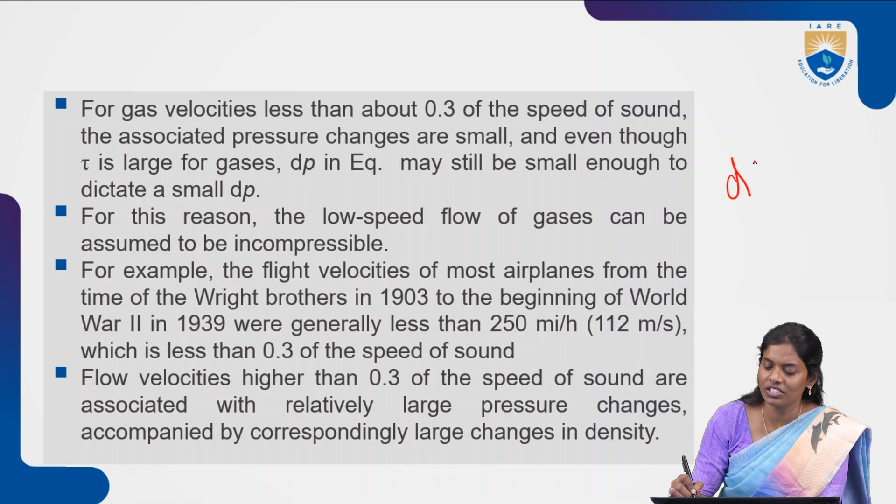So with that there is a change in density. The formula is d rho equals rho tau into dp, which means change in pressure is directly proportional to change in density. Where there is a significant change in pressure, correspondingly there is a change in density, depending on the effect of compressibility.

Compressibility is defined as minus 1 by v, dv by dp. When there is a change in the compressibility effect, the formula becomes d rho equals rho into tau into dp. So that change in pressure gives us the change in density.

For gas flow, if the velocity is less than Mach 0.3, the associated pressure changes will be small. Even though tau is large for gases, from the equation del rho will be very small. So when dp is of less value, d rho will also correspondingly be of less value. Due to this, we consider that gas flow field as an incompressible flow.

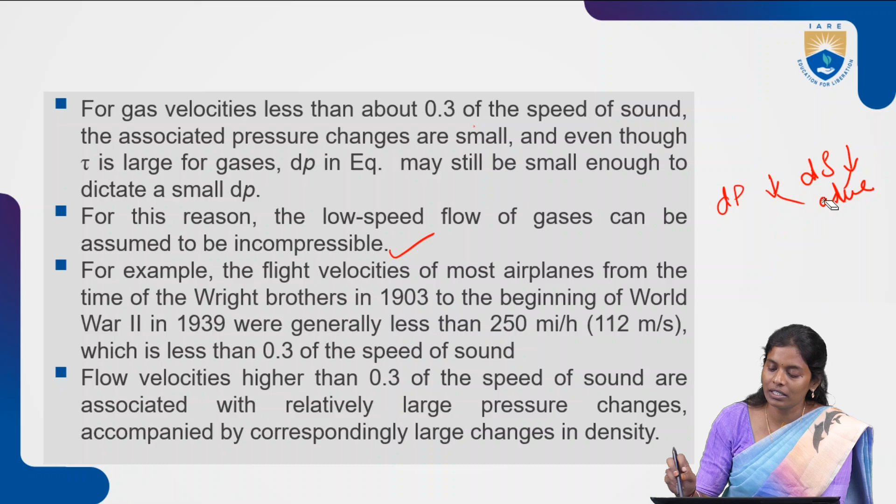Consider the example of flight velocity of airplanes from the time of the Wright brothers, from 1903 to 1939, where the speed is varying but remains less than Mach 0.3. This means the flow field can be considered as incompressible flow.

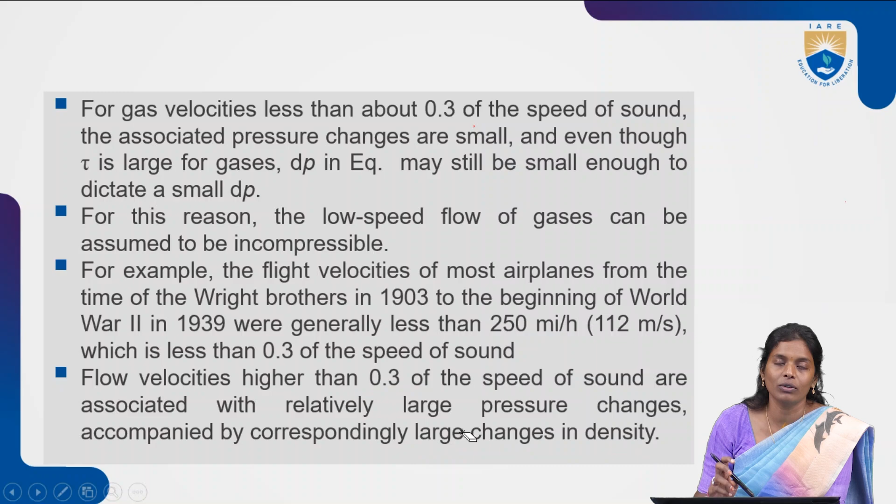With flow velocities higher than 0.3 times the speed of sound, the pressure changes will be more, and correspondingly there are larger changes in density. So at higher velocity, the change in pressure causes larger density changes, and that is what we call compressible flow.

At that time, compressibility effects on airplane aerodynamics became important. Since the advent of high performance aircraft of the 1940s, we see compressibility effects considered as one of the important factors. Indeed, for modern high speed subsonic and supersonic aircraft today, the older incompressible theories are wholly inadequate, and compressible flow analysis must be needed.

Compressible flow is considered as one where the change in pressure over the characteristic length of the flow, multiplied by the compressibility, results in a fractional change in density, d rho by rho, that is too large to be ignored. It means we can't ignore the density changes, we have to consider them into the picture, meaning the flow is a compressible flow.

In most practical problems, if the density change is 5% or more, we consider that flow to be a compressible flow. This is one of the factors showing why the importance of density is there.

So if your density change is small or lesser, you can consider it as a constant. So at that time, we will be calling the flow an incompressible flow. Flow is considered as an incompressible flow.

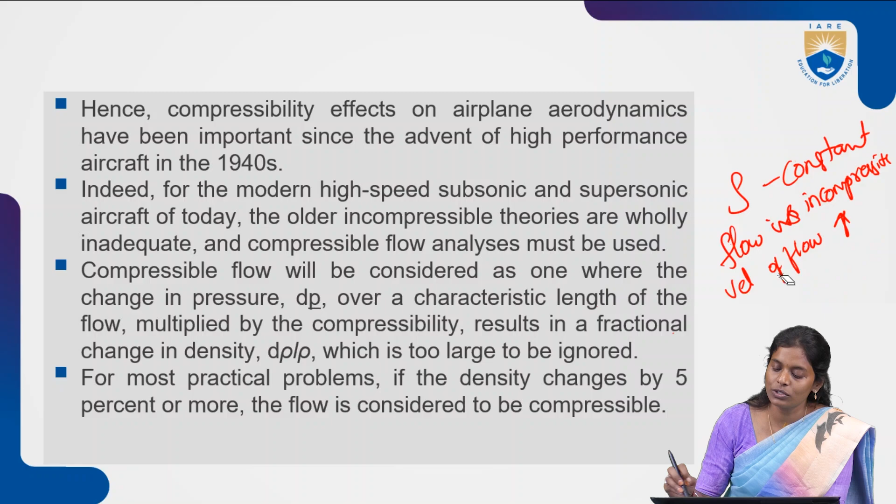So as the flow is increasing, what will be happening? As the velocity of the flow is increasing, there will be pressure changes. So P change will be there, that is, pressure changes will be there. So correspondingly the density changes will be there. Those density changes at higher velocities we won't be able to neglect. So that's why we have to consider the effect of compressibility inside the flow.

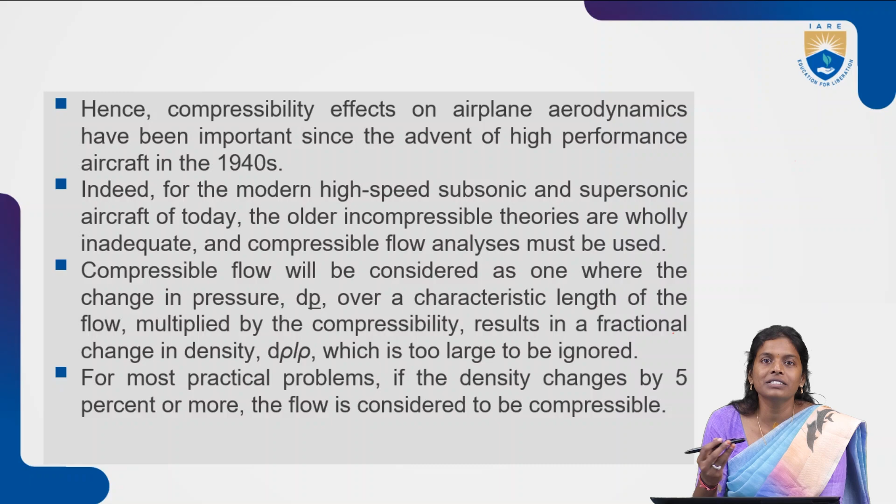So for that, as we are telling, if the density changes are 5% or more, the flow is compressible. So before that, we are stating that flow velocities are increasing. That means as the flow velocity is increasing, there is a change in the density. So it means that the characteristics of the flow regime will also vary with respect to the flow velocity. So now we talk about what the flow regimes are, the different categories of it.

So before going to that one, we will be considering the far upstream of the body. On the far upstream of the body, the flow is uniform. So with the free stream velocity, uniform flow is there. There is no change in the flow direction. So V infinity, that is the free stream, we are considering.

So after that one, let's see what a streamline is. A streamline is nothing but a curve in the flow field which is tangent to the local velocity vector V at every point along the curve. So that particular one we will be calling a streamline.

So now we will be considering a flow field. Suppose this is a flow field. Inside this particular flow field, consider any arbitrary point. At that arbitrary point, what will be there? Generally flow properties means pressure, temperature, density, and velocity. These will be the local pressure, temperature, density, and velocity at that particular point. So all these quantities are point properties.

So at this particular point, suppose we consider P1, T1, ρ1, V1. If we consider another point, the pressure, temperature, density and velocity might be different. So these quantities may vary from one point to another point.

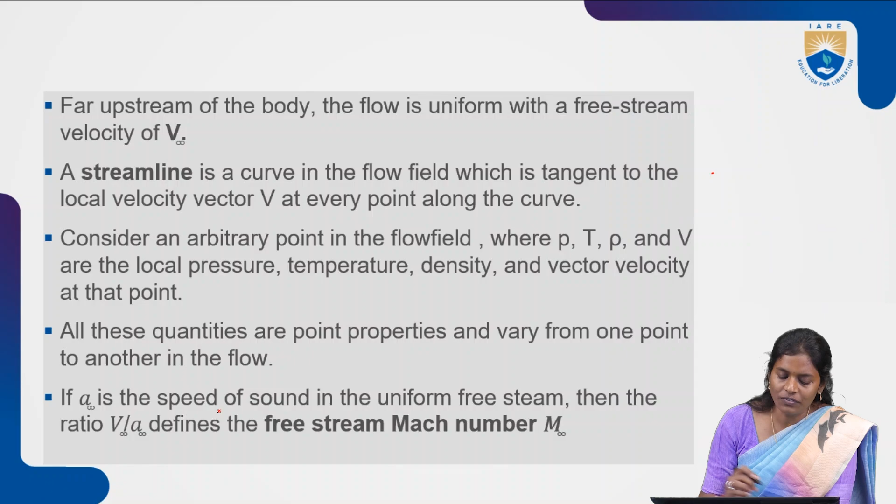Okay. Suppose a is the speed of sound in a uniform free stream. Then the ratio of the velocity of the object divided by the speed of sound is nothing but the Mach number. This is the number which tells us the flow response. We know the speed of sound is nothing but the square root of gamma RT, right? And V is the velocity of the object.

Now, compressible flow means the flow velocity is increased, higher flow, right? Basically, above Mach number 0.3 we call it compressible flow, and Mach number less than 0.3 we call incompressible flow. Below this, the density is constant; above this, density varies. So considering this as the base, above 0.3 Mach number we consider it compressible flow. We already know the speed of sound, a constant value of 340 meters per second, and we will have the velocity. If that changes, then we will have Mach number variations.

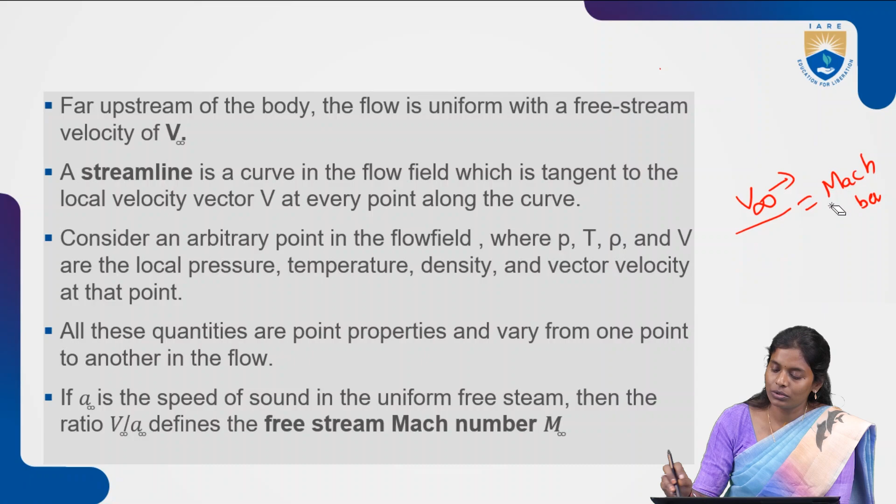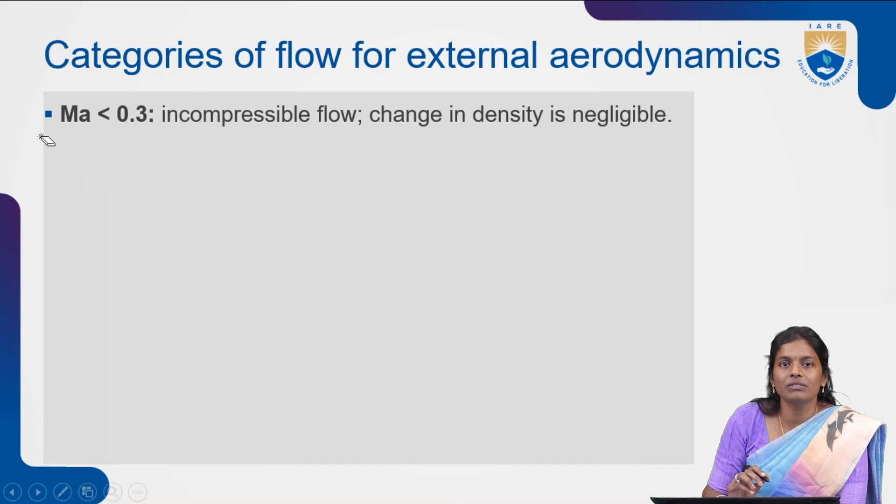So coming up, we'll see the categories of external flow. As I told, if Mach number is less than 0.3, we consider it an incompressible flow. I am not telling the density change will not be there. The density changes will be there nevertheless, but they are negligible, or we can consider it as a constant.

Mach number between 0.3 and 0.8 we will be calling subsonic flow, where density changes are significant and shock waves will not appear. It means there is no formation of shock waves, so there won't be abrupt changes in the flow field.

So that's why the shock wave formation will not be happening at this particular range of the Mach number. Next, coming to the Mach number between 0.8 to 1.2, the flow is called transonic flow. Here the shock wave will appear and divide the subsonic and supersonic flow regimes. So there will be a separation of the subsonic and supersonic flow regimes. And there is one more.

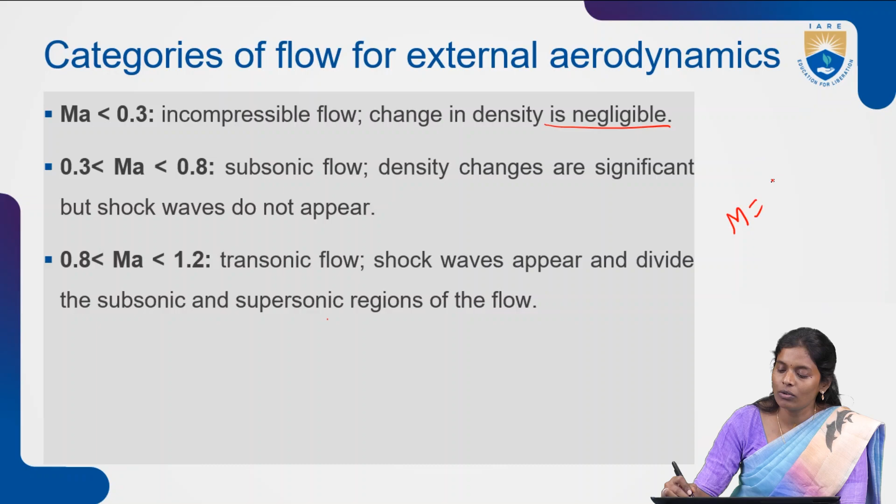If M, the Mach number, equals 1, we call it sonic flow. At that time, the velocity of the object will be equal to the speed of sound, right? Only when these two are equal will we have a Mach number of 1. So at this time we call the flow a sonic flow. Next, transonic flow is characterized by a mixed region of locally subsonic and supersonic flow.

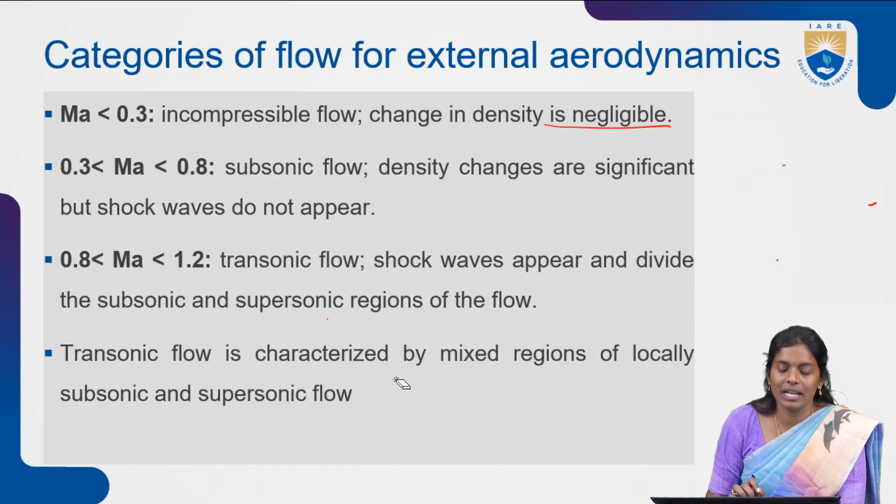Basically, what we call subsonic flow is Mach number less than 1. Mach number above 1 we call supersonic flow. But in the transition from subsonic to supersonic, there is a range of 0.8 to 1.2 that we call transonic flow. That's why they have said that transonic flow is characterized by a mixed region of locally subsonic and supersonic flows.

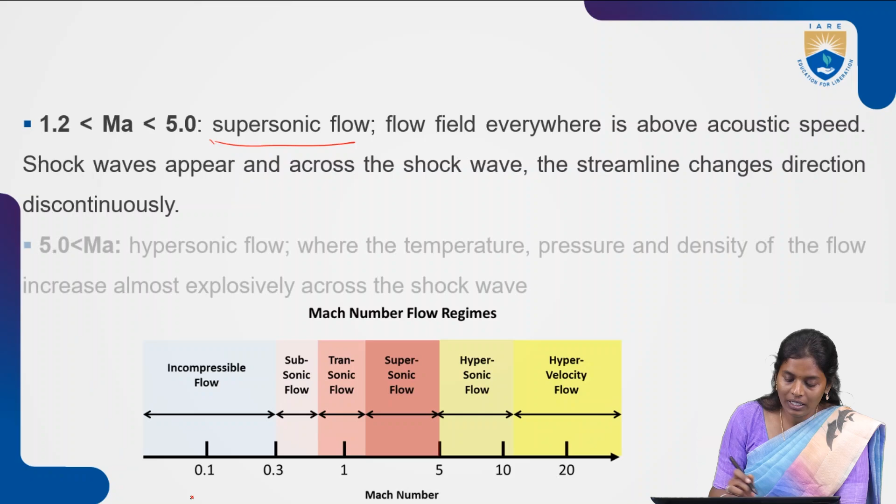Next, if it is 1.2 to 5, less than 5, we call it supersonic flow. Here the flow field everywhere will be above the speed of sound. Shock waves will appear, and across the shock wave the streamline changes direction. There is a streamline change there discontinuously. So here you can see that next is Mach number

above 5, right? If you have a Mach number above 5, we call it hypersonic flow, where the temperature, density and pressure increase almost explosively across the shock wave. There are changes in the temperature, pressure and density. So that we call hypersonic flow.

So here you can see the entire flow regime based on the Mach number. As I told, from Mach number 0 to 0.3 we call it incompressible flow, where density change is negligible, or we can consider density constant. The changes are not taken into the picture. From 0.3 up to 0.8 is the subsonic region; generally we call it subsonic until 1.

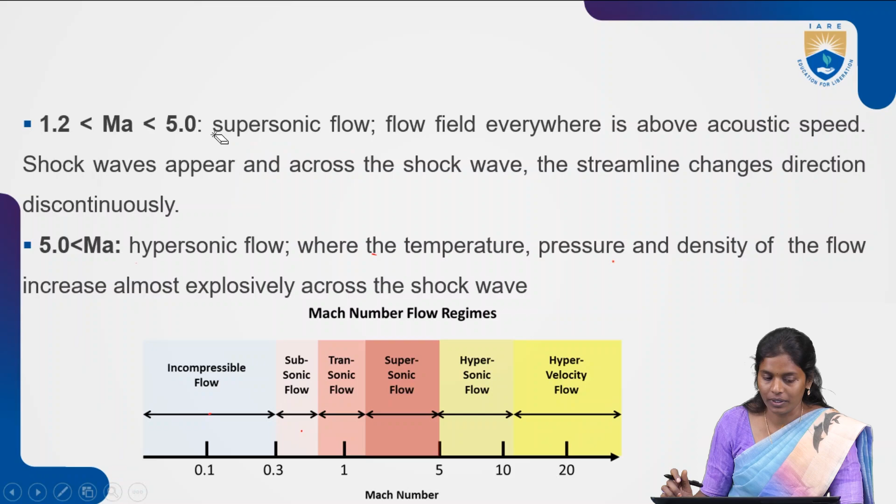Then 0.8 to 1.2 we call transonic flow, and below 5 we have supersonic flow. Above supersonic is hypersonic flow. More than that, we call it hypervelocity flow. So this is the flow regime of compressible flows based on Mach number. Now we will study these flow regimes in detail.

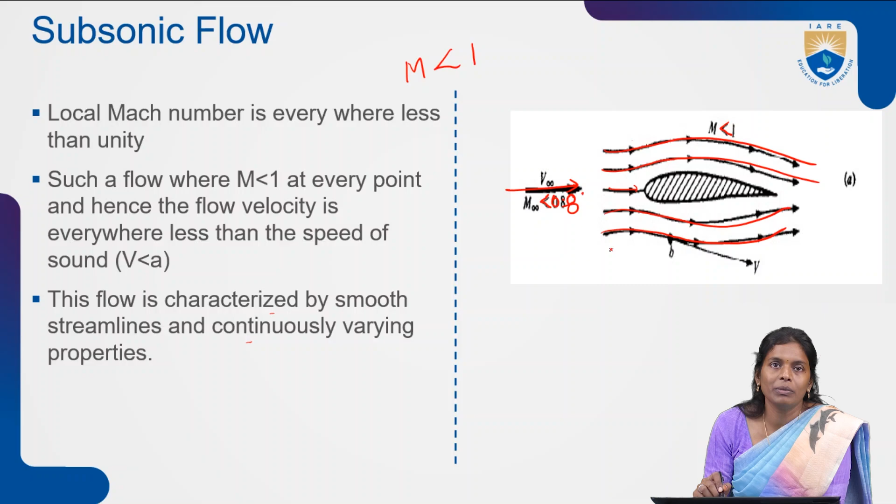The flow field is characterized by smooth streamlines and continuously varying properties. As I told, the properties will not be the same from one point to another. Though the flow is smooth, the properties change from one location to another. Initially we have straight and parallel streamlines in the free stream.

These begin to deflect from the free stream far upstream of the body, according to the position and the shape of the body. As the flow passes over the airfoil, the velocity V at the top surface increases above the free stream value. So what will the velocity be at the Mach number?

Now what we are telling here, the free stream is passing at less than Mach 0.8. So as it passes over the airfoil, V increases, and correspondingly M will also increase. But overall, the value of Mach number will be less than 1 only. It will not cross 1. So that is the one thing which we have to consider inside a subsonic flow: we will be having the Mach number less than 1 throughout the flow field.

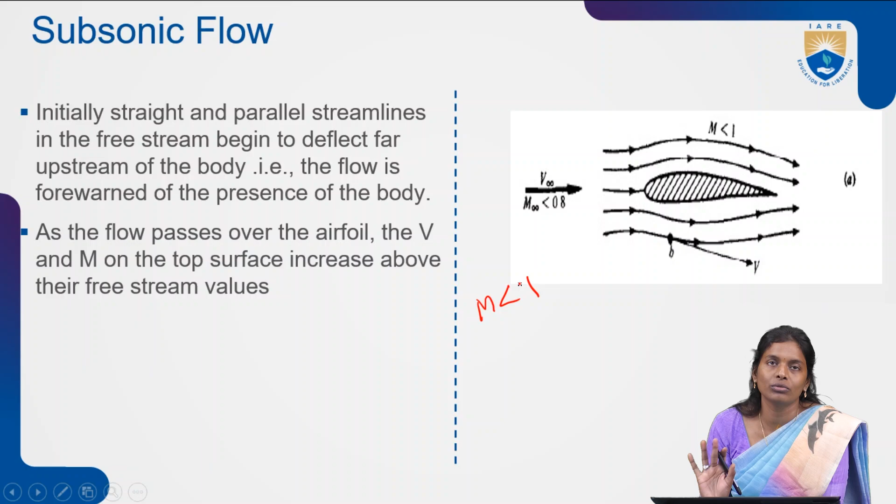Right. So now, next coming to the transonic flow. If the free stream Mach number remains subsonic, but it is sufficiently near to 1 — generally subsonic flow is less than 1, right? — the flow expansion over the top surface of the airfoil may result in a local supersonic region.

So you can see here, at the front we are having less than Mach 1, but in this particular region the Mach number is greater than 1. After a certain region, we are having less than 1. Here there is a formation of a shock wave. So it results in local supersonic regions. Such a mixed region of the flow, where we have a subsonic region, a supersonic region, and again a subsonic region, is defined as a transonic flow.

So if M is near 1, it is enough to produce a pocket of locally supersonic flow. This pocket will be terminating with a shock wave across which there will be discontinuous changes in the flow properties. As you know, if you are increasing the flow velocity, there is a change in pressure and correspondingly a change in density, right? It means the flow properties will be varying inside this particular pocket.

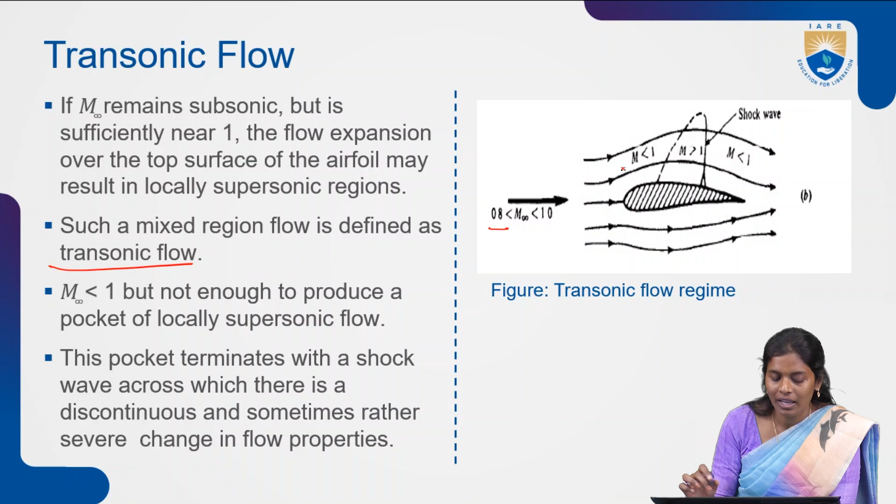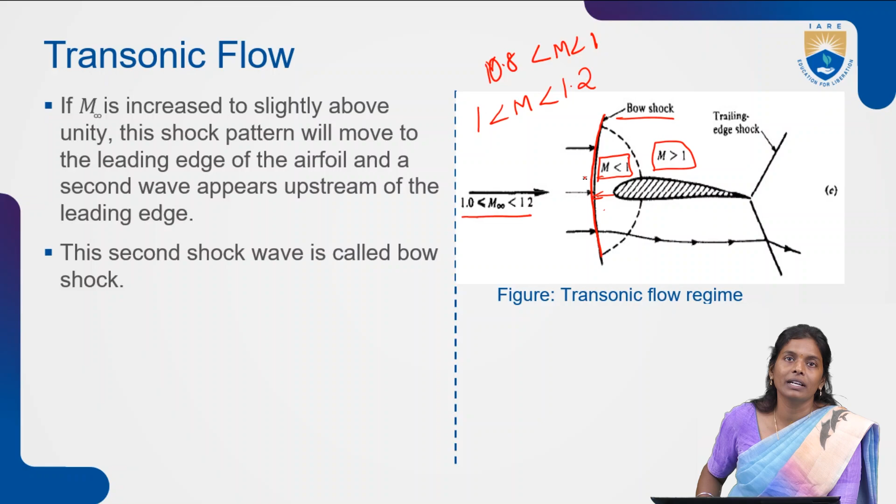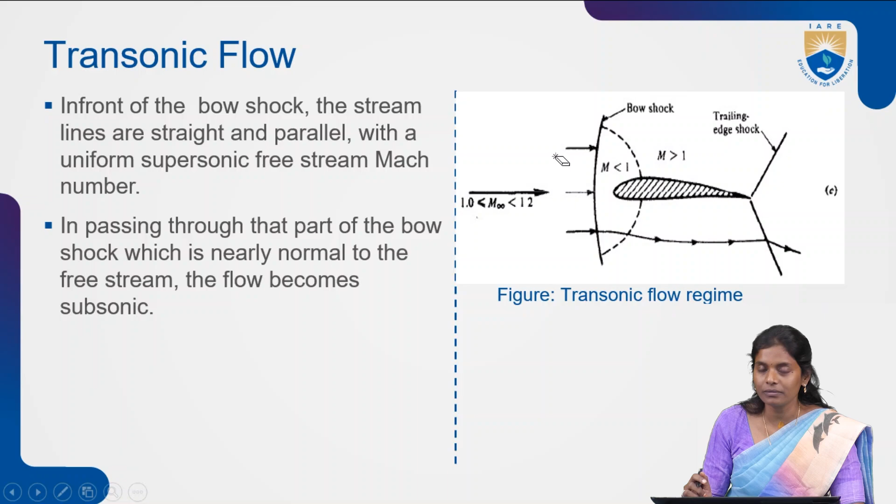In front of the bow shock, the streamlines are straight and parallel with the uniform supersonic free stream Mach number. In passing through the part of the bow shock which is nearly normal to the free stream, the flow becomes subsonic. That is the reason at this location we are having the flow as subsonic. So at this particular region we have a subsonic region.

So next, supersonic flow. Basically it is above Mach 1. But since the transonic flow lies between 0.8 and 1.2, specifically we will call it supersonic above 1.2. So now consider a flow over a wedge. A straight oblique shock wave is attached to it; a normal shock, by contrast, will be the perpendicular one.

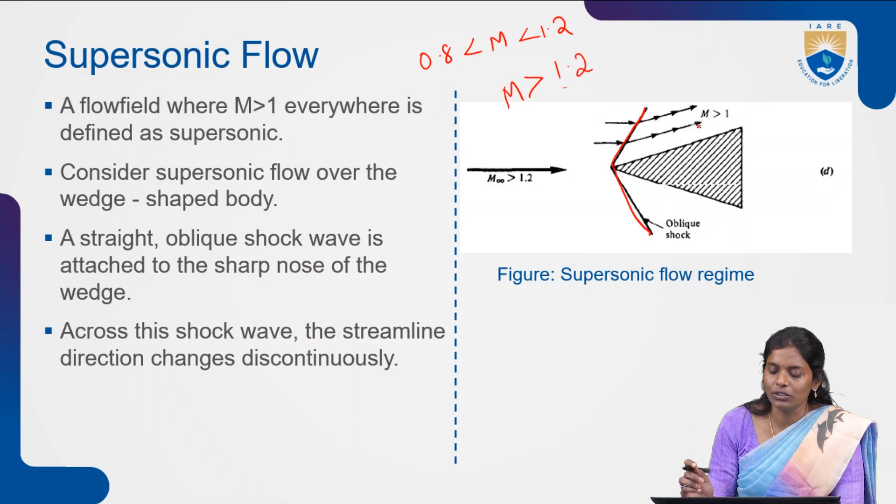So oblique shock means it is at a certain angle. We will see this in detail in module 2. But for the time being, understand that oblique shock means a wave at a certain angle which is attached to the sharp nose of the wedge. Across this shock wave the streamlines are changing; there is a change in the streamlines.

Ahead of the shock the streamlines are straight, parallel and horizontal. Behind the shock wave they also remain straight, but they take the shape of the wedge. Suppose this is the flow region, and this is the wedge we are considering. For this wedge a shock wave will form, that is an oblique shock wave. After crossing the shock wave, the flow field takes the direction of the wedge surface.

So the flow is supersonic at the upstream and the downstream of the oblique shock wave. You can see here we say Mach is above 1.2, and here also the Mach number is above 1. That is nothing but the supersonic region. Here the temperature, pressure and density of the flow increase across the shock, meaning ahead of and behind the shock wave there are changes in the flow properties.

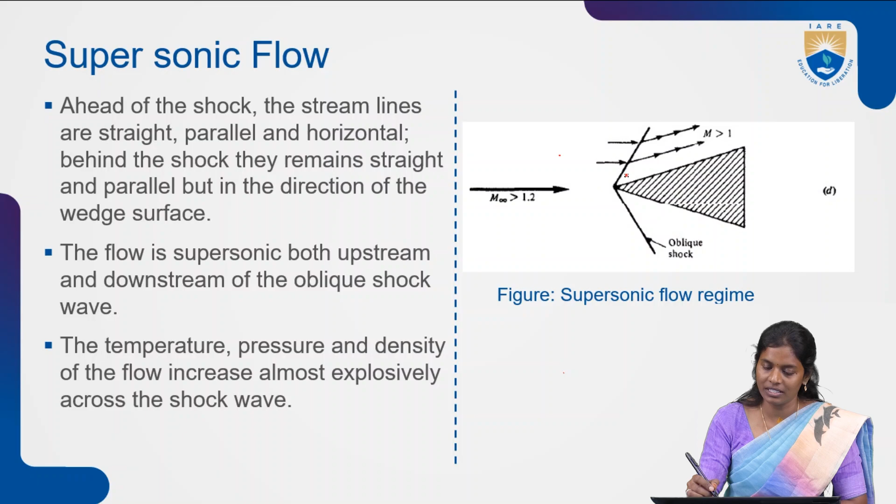Right. Next is Mach number above 5, which we call hypersonic flow. At higher speed the changes in flow properties are also larger. Previously for the wedge we had a shock wave formation, but it was not towards the surface; it was at a certain distance, at a certain angle. Here, the oblique shock wave that forms comes closer to the surface of the body.

The flow field between the shock wave and the body becomes very hot, enough to dissociate or even ionize the gases. So in this flow regime, ionization of the gases can happen. These effects, thin shock layers and hot chemically reacting gases, complicate the analysis of such flows. At this regime studying the flows is very difficult, because as the velocity increases at that particular height, the temperature changes, enough to dissociate or even ionize the gas particles.

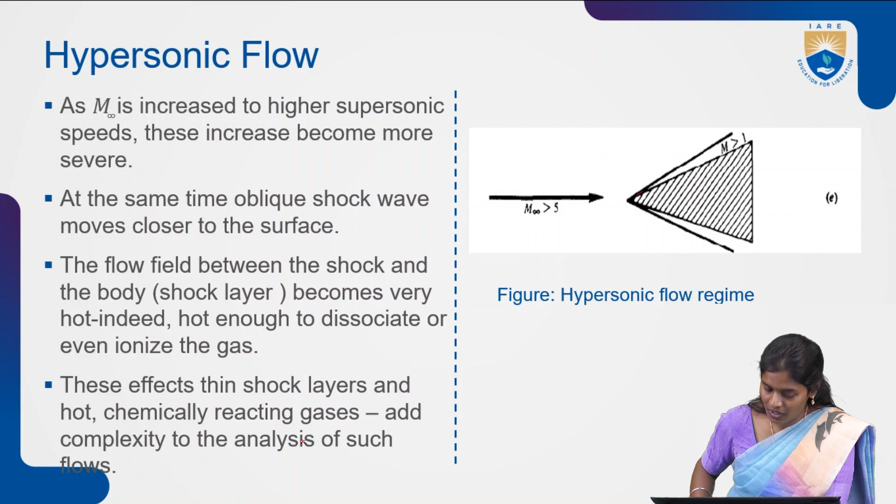So studying those thin shock layers and the interaction effect of the heat occurring on the body makes such compressible flows complex to analyze. So above Mach 5 we call it hypersonic flow. Mach 5 divides supersonic and hypersonic flow.

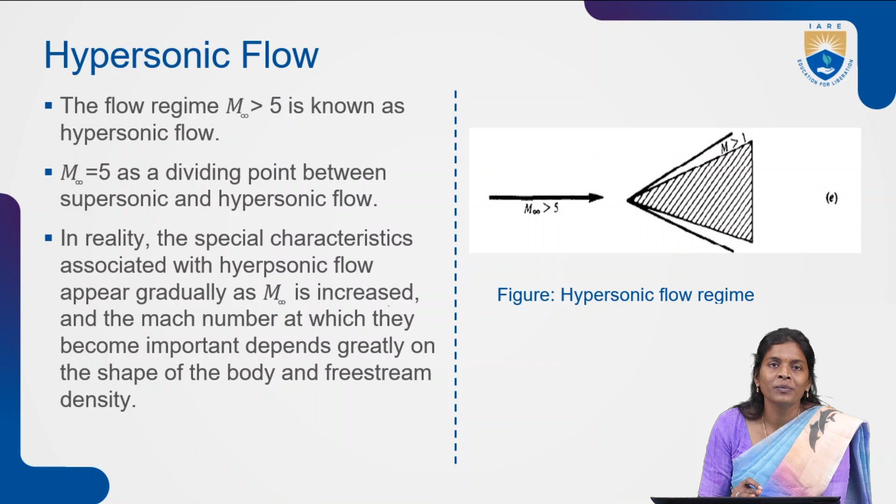In reality, the special characteristics associated with hypersonic flow as Mach number increases depend on the shape of the body and the free stream density. The Mach number at which they become important depends greatly on the shape of the body and the free stream density at that particular location. So mainly it depends on those two characteristics: the shape of the body and the free stream density. So this is about hypersonic flow.

Now coming to the Mach number, as I stated earlier, it is the ratio of the speed of the object to the speed of sound. Here you can see different flights based on Mach number. Subsonic, less than 1, and the transonic region have transport flights. Higher we have fighters, and higher still, space shuttles or re-entry vehicles, which fall above Mach number 5.

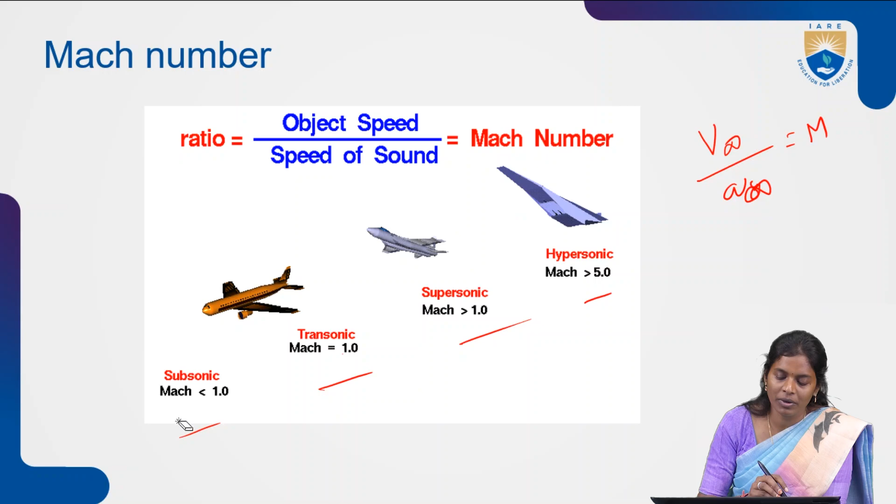So we will see in detail what kind of flights will be there. So less than Mach number 1 we will be having general aviation, where we will be having propeller propulsion. Aluminium skin we will be taking, and the straight wing, which can vary also. Now as the technology has increased, as the aviation industry has evolved, we are changing to different kinds of wing cross section.

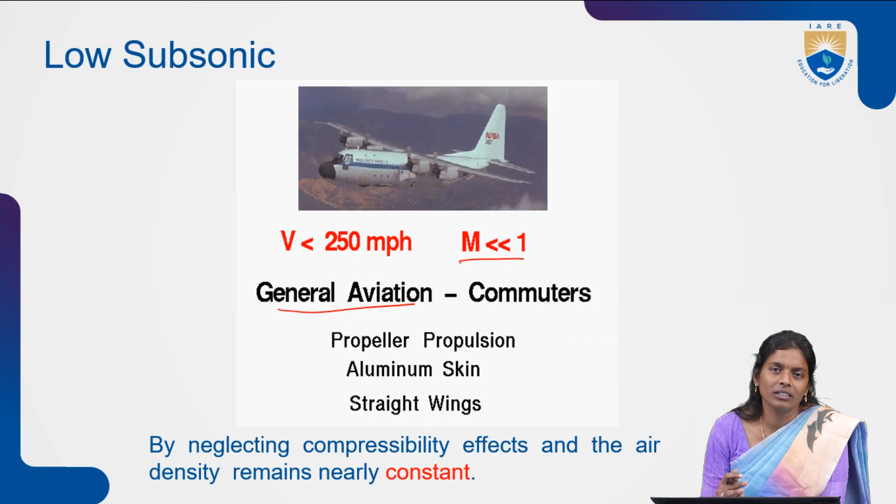So what we are doing here is, at this particular time, we are neglecting the compressibility effect. That means we are considering the density is nearly constant, or we are not taking the density into the picture. We are neglecting the density effect at this.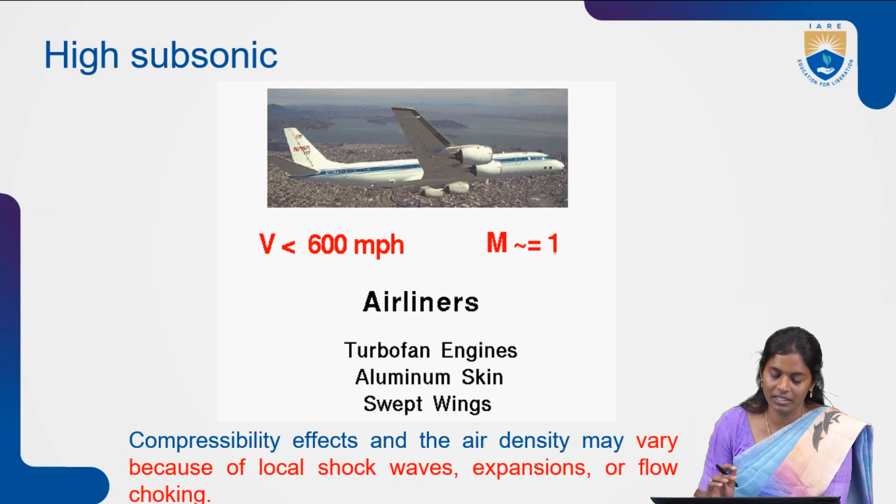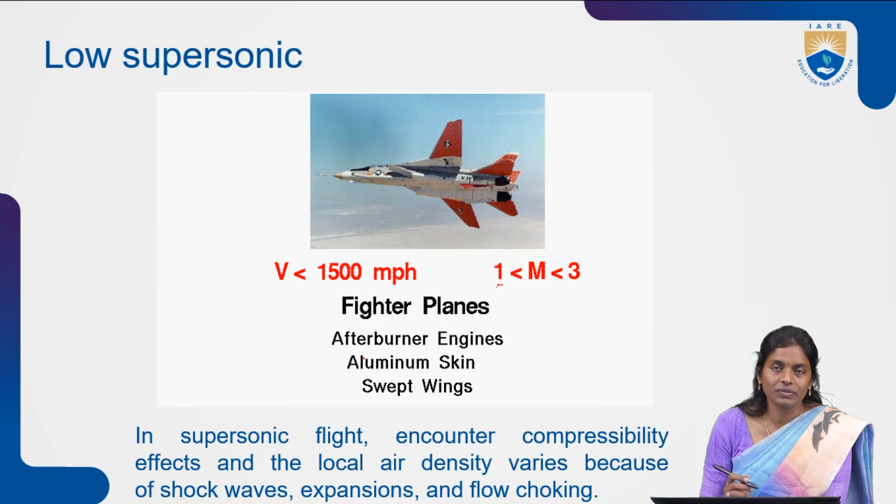So now the lower supersonic region, that is Mach number less than 3. So here fighter planes we can consider. Afterburner engines will be used here. Aluminum skin itself they will be using, and here also swept wings will be considered. So here also the same compressibility effects will be considered, and the density will vary because of the formation of shock waves, expansion, and flow choking occurring at this particular region.

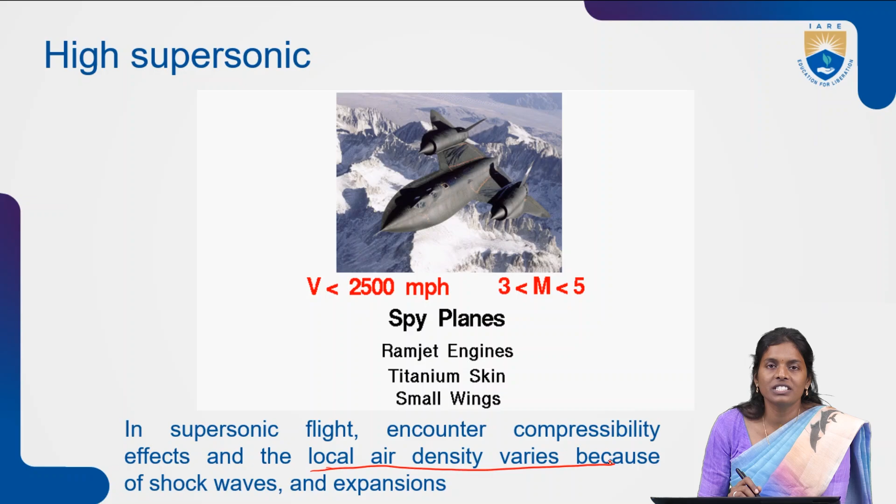So at the high supersonic, we will be having the spy planes, ramjet engines, and the skin will be titanium, with small wings. So why the skin will be varying is because, as the flow moves faster, what we stated earlier, there is a change in the flow properties, right? Due to which we are choosing a material that will be able to withstand those abrupt changes in temperature also. So in the supersonic effect, we will be considering the compressibility effect. Local density varies because of the shock waves and the expansion waves formed.

So next, the low hypersonic region is basically made up of scramjet, ramjet and rocket engines, and cooled titanium or nickel skin we will be using, and here we will be having shorter wing sections only. We don't have the larger sections like in commercial aircraft. So large variation in air density will be there. Pressure changes will also be there because of the shock waves and expansion.

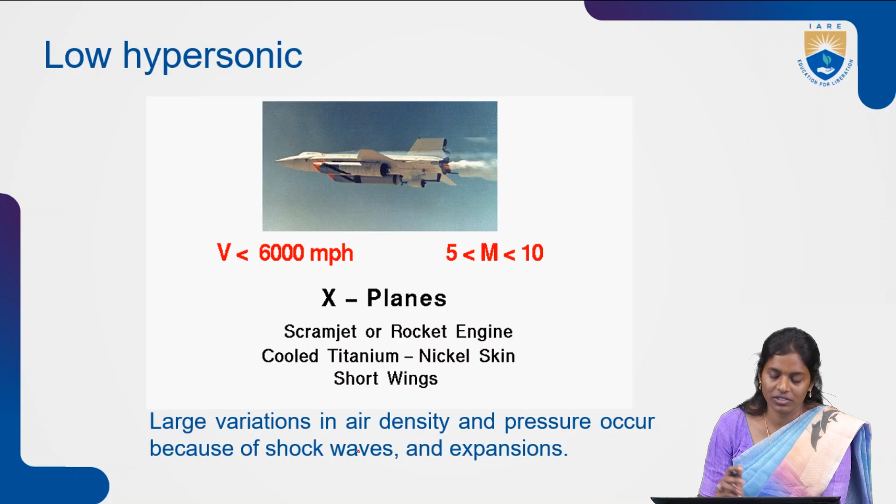Right? Now the next one is hypersonic re-entry, or hypervelocity. Those are basically nothing but the space shuttles. So we will be having rocket engines. We will be using a thermal protection system because it has to go to the higher atmosphere, where there are changes in conditions. As the height increases, the flow properties change. So in order to sustain that, we will be using thermal protection, and we will have short blunt wings.

So the air density is very low because the re-entry occurs many miles above the Earth's surface. Strong shock waves will be generated on the lower surface of the spacecraft. So this is the hypersonic re-entry vehicle system.

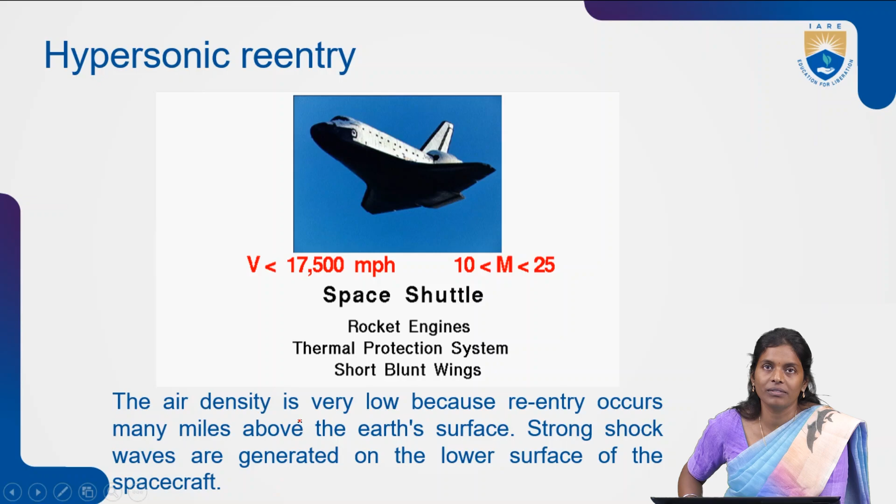So now, overall, if you see the relation between the Mach number and the flow regime, whether density variation will be there or not, or whether shock waves form: if it is less than 0.3, the flow is incompressible, density is constant, and shock wave formation will not happen. Less than 0.8, we have subsonic, density changes occur, a gradient change, and shock wave formation will not happen. But between 0.8 and 1.2, the transonic region, there is a significant change in the density gradient, and the first appearance of shock waves will be seen here.

So at 1.2 to 3, the supersonic flow regime, the density effect will be there, and there is a formation of shock waves.

So shockwave formation we can see directly here. If the Mach number is above 3, hypersonic flow, the density gradient will be dominant, and dominant shock waves we can see at this particular flow regime.

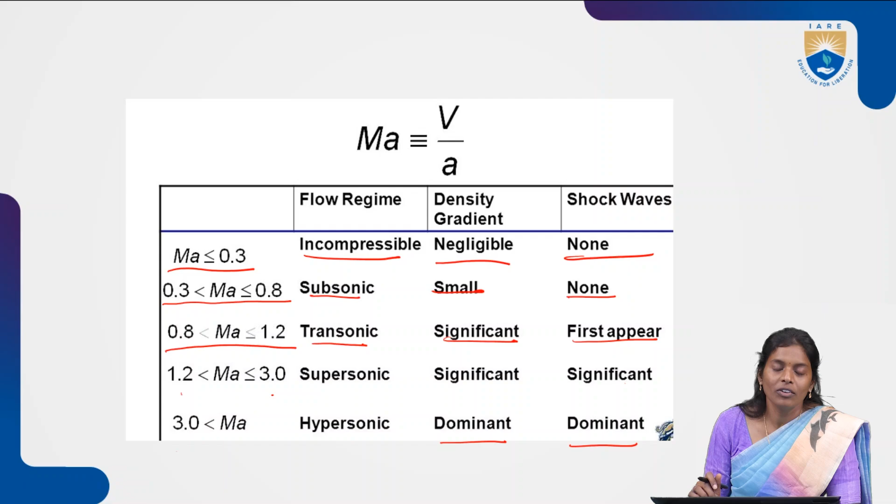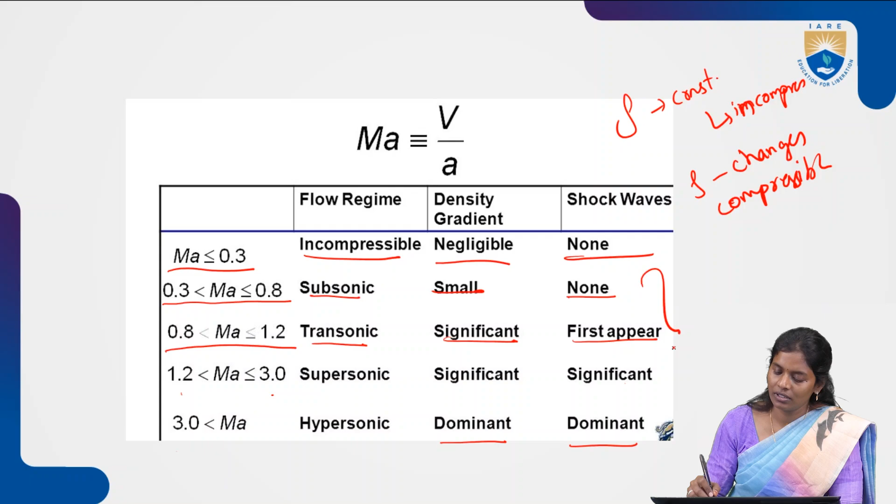So these are all about the flow regimes. When density is constant or negligible, that means incompressible flow. If density changes, that's compressible flow. So these are the different flow regimes which we have seen.

Now we'll talk about what is a continuum. Consider the gas to be a continuum. Clearly a gas is composed of a large number of discrete atoms or molecules, all moving randomly and colliding with each other. That's nothing but the gas being in a continuum, meaning a large number of molecules or atoms will be moving randomly here and there.

The molecules continuously move here and there and collide with each other. This microscopic picture of the gas is essential to understand the thermodynamic and chemical properties of high temperature gas. When these molecules collide with each other, by considering that gas, we will be able to understand its thermodynamic and chemical behavior at high temperature.

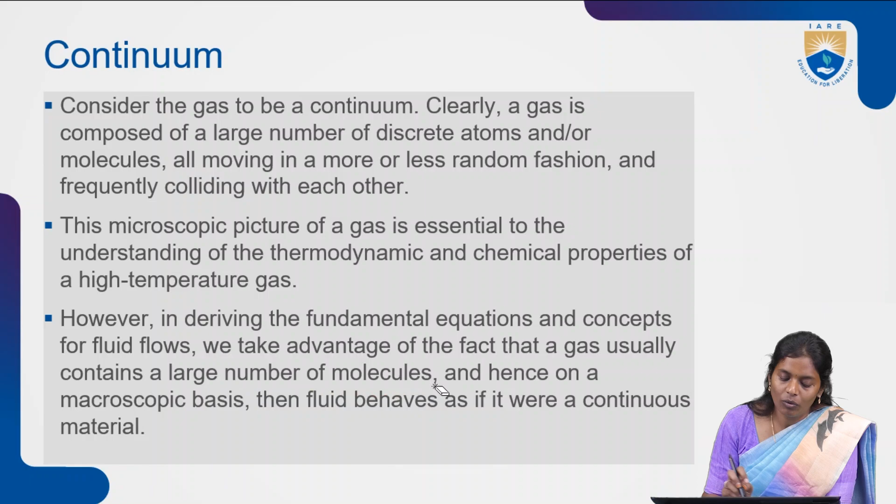However, in deriving the fundamental equations and concepts of fluid flow, we take advantage of the fact that gas usually contains a large number of molecules. Hence, on a macroscopic basis, we consider the fluid to be a continuous material. This continuum assumption is violated only when the distance between atoms or molecules during collision is large, of the same order of magnitude as the characteristic dimension of the flow.

This implies low density or rarefied flow. It is violated when the distance between two molecules' collisions is large; at that point we call it low density or rarefied flow. The extreme situation, where the mean free path is much larger than the characteristic length and virtually no molecular collisions take place, is free molecular flow.

So it means, somewhere randomly, if the mean free path between two molecules is large, we call it free molecular flow. In this case, the flow essentially consists of a stream of remotely spaced particles.

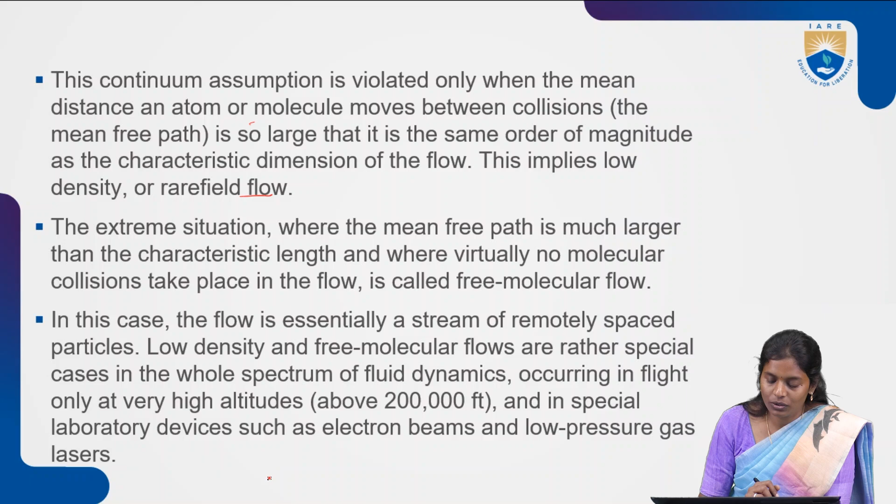So low density and free molecular flow are rather special cases in the whole spectrum of fluid dynamics, occurring in flight only at higher altitudes. So only in those cases will we see this; otherwise, most of the time we will be considering the continuum.

Apart from this continuum topic, we will also categorize flow fields differently, basically into viscous flows and non-viscous flows. What I mean by viscous flow is that there is a change in viscosity and thermal conduction.

And there is dissipation. So when these changes are present in a flow, that means viscous flow will be there. When it comes to non-viscous flows, viscosity will be constant and there won't be much change in the thermal conduction.

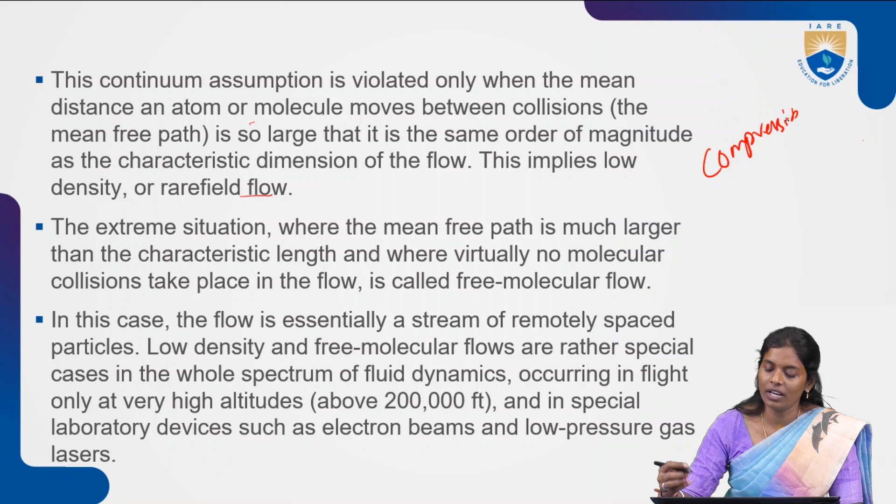So this is overall the topic we covered yesterday, the compressible flow introduction. We have seen isothermal compressibility, then isentropic compressibility, then the Mach number relation, how it changes for compressible flow and incompressible flow.

Then today's class we have seen the flow regimes, what are the different types of flow regimes and how they have been categorized, and we have talked about the continuum and the variation between viscous flow and non-viscous flow.

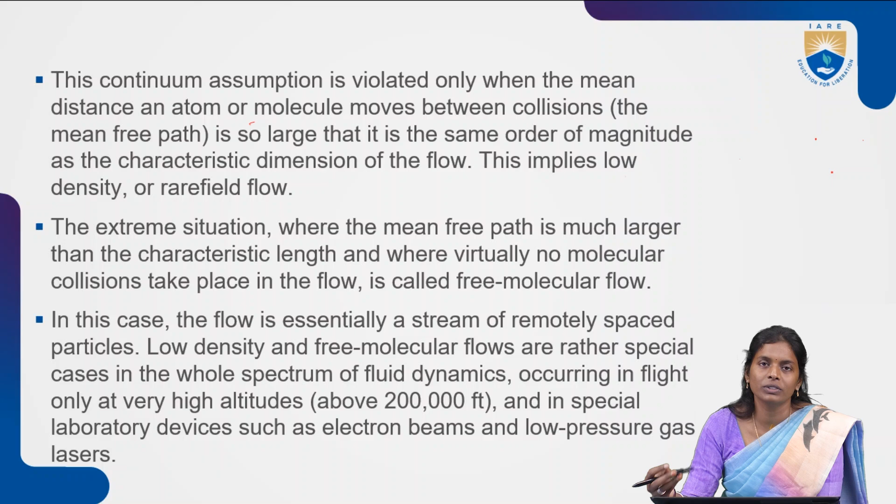For tomorrow's session, as we stated that to measure the effect of thermodynamic properties we need to know, we will see a basic review of thermodynamics and fluid mechanics in the next session. This way we will revise all the concepts initially and then move directly towards how the governing equations have been formed for compressible flows.

So this is the textbook which has been referred for this particular session, Modern Compressible Flow with Historical Perspective by John Anderson, and you can also refer to the Fundamentals of Aerodynamics textbook.